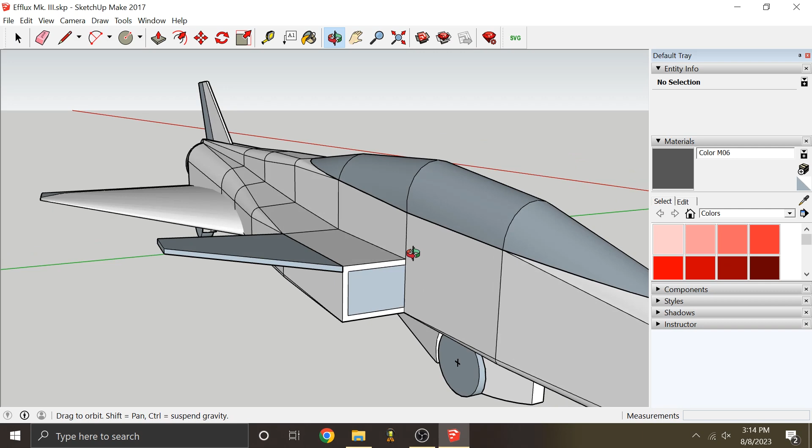I think the first place we're going to start here is getting the intake ducting sorted out, as well as the exhaust ducting, but the exhaust ducting is going to be probably a lot simpler. My main concern is we've got to make sure we leave enough space for all of the powertrain and avionics, while keeping a relatively straight shot from the intake into the fan face. We also have to add that little deployable cheater door and figure out how we're going to actuate that. I think I'll just start with the exhaust tube, because that'll probably be the simplest to do.

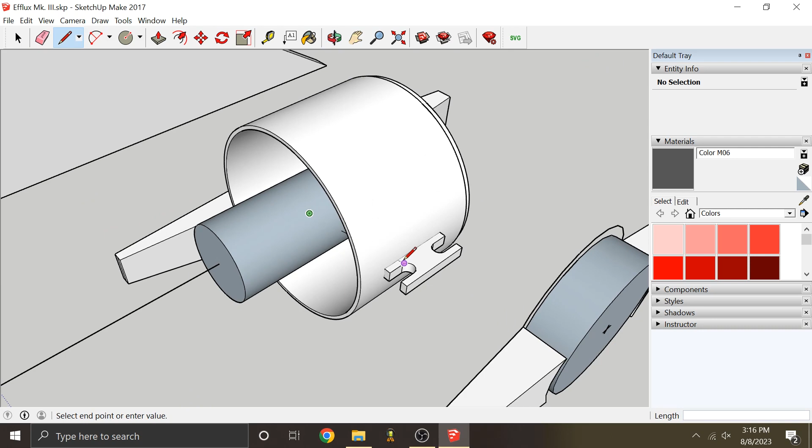So it does appear centered, so then this should be radially symmetrical. I designed this little step, a 3/16 step here, so that the foam board can slot inside the actual nozzle extension. So this will be the actual surface we're going to, and it'll go all the way to the outside diameter of the fan, and we're going to add 3/16 of foam thickness to that.

So then our thrust tube is going to look something like this, and that 3/16 will go to there. Just a simple conical tapered part. There we go. So that right there is our thrust tube.

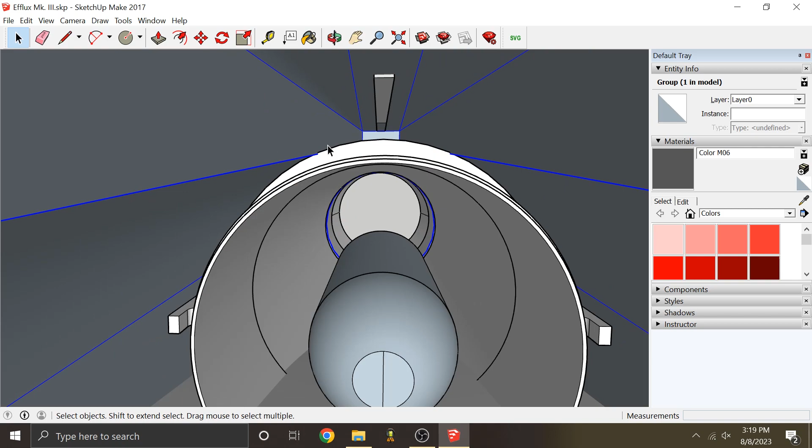And actually, if you look at that, we're going to have to do some relieving cuts here sometime. Or actually, I think what will end up happening is that this outer surface will get relief cut to clearance fit here, or something like that. We'll have a bunch of formers in here that'll go around the ducting and support it once we figure out exactly what's going on here.

Alright, so now it's time for the inlet ducting. This is going to be pretty fun to do. So the first thing I see is that this is our big battery right here, so we're going to have to stay to this side of it. So whatever that battery is doing, we're going to have to define a plane. Basically we're going to take this face straight back until the end of the battery. There we go, so there's our inlet face on one side.

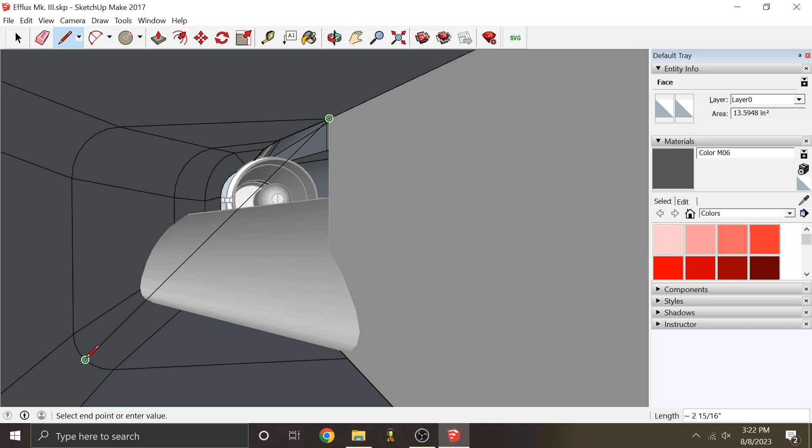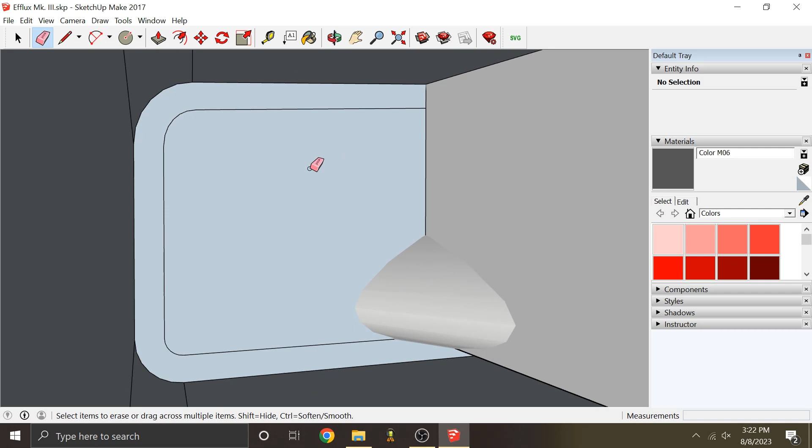The thing is, I wonder what sort of area we're dealing with here in this cross section, because if we add the thickness of the material here, I hope it's not too far below the fan swept area. Generally, when you're doing inlet ducting for ducted fans, you want to try and keep the area either expanding or constant if you can. You don't want to constrict it just to open it back up again, because if you do that, you're just making the air faster in the constricted area, which just gets you more frictional losses, more turbulence.

Oh, there's something there, but this is just that area, right? So this is 13.6 inches squared, whereas this is... oh, is that actually more? Really? That's actually more area. So that's good, it's actually expanded past what it is up front, because the inlet has gotten taller.

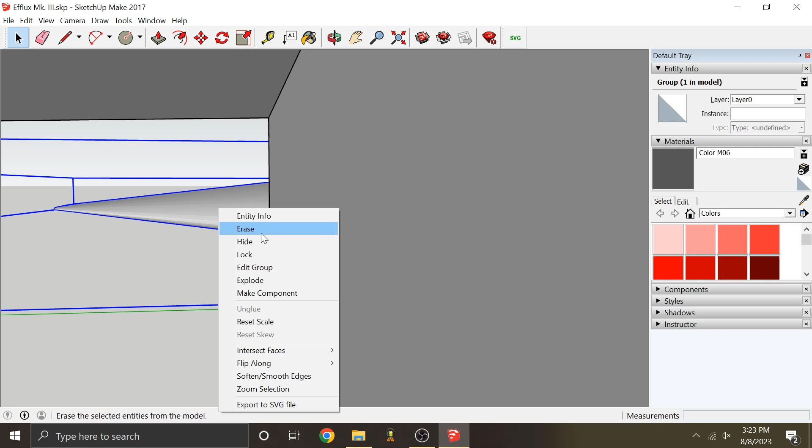So that's good. Okay, so now after this battery here, we're going to start getting into the wings here, but I'm just going to ignore the wings for now. We're going to have to sort of integrate all of this stuff together. This plane is very tightly packed, so there's going to be a lot of intersection and stuff we're going to have to deal with, and everything's going to be real close together.

So after here, well, now we have the top of the inlet surface. We could actually fill this stuff in, something like that. So we're going to have some part back here that sort of tapers inward, something like that. That'll allow the two streams to converge together. So that's our little inlet diverter thing there. So then the airflow is going to meet right here.

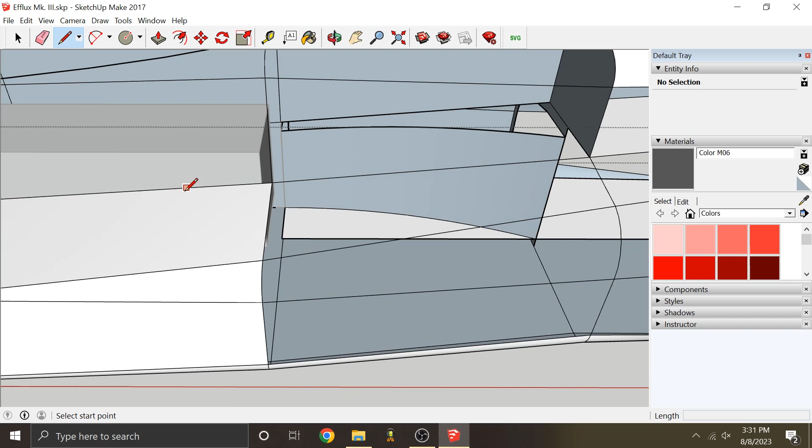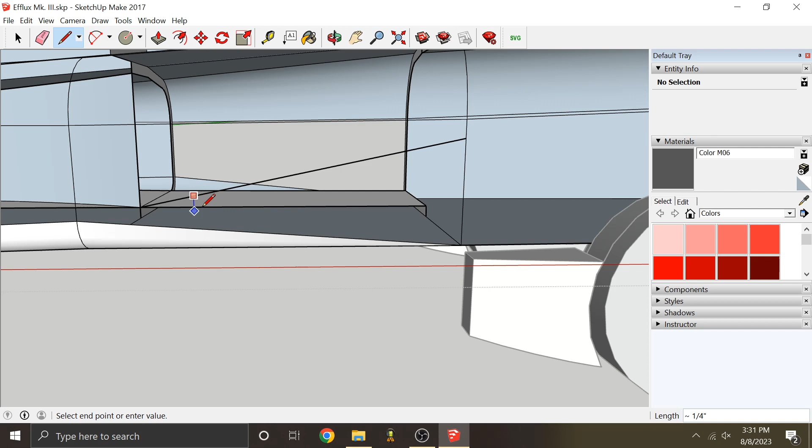So I'm thinking about how big I want this door to be. It's probably going to be fairly large, like about 6 inches long seems a good size, because what I'm concerned about is, since it's going to be hinged, we don't want the actual angle to be too big to get a lot of deflection, because that angle will induce flow separation from whatever flow is coming underneath in this direction and getting sucked up.

We don't want this angle to be too aggressive, or else it'll just separate here. From this side of the inlet, there's basically just going to be one thickness of foam. Whatever is pulling from here will probably get turbulent on the bottom anyway, but ideally it'd be a shallower angle. That also makes the surface bigger.

That makes the actuation requirements larger in terms of torque, but it also gives you a lot more airflow potential for that cheater door. So instead of going through all this inlet, you could just come in from here.

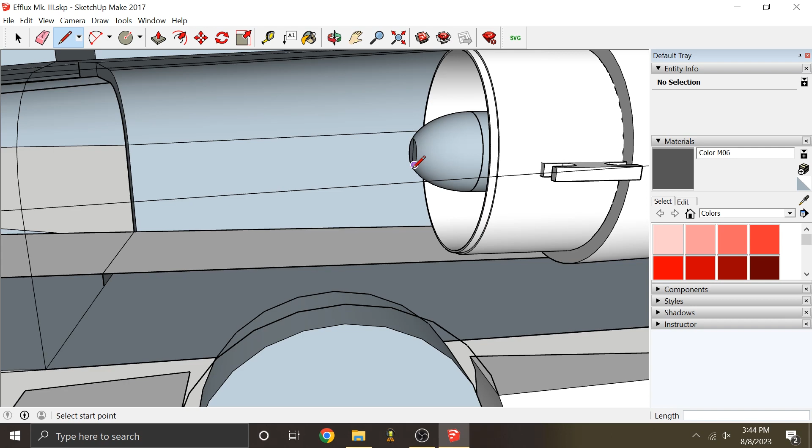Start it right about here so we get right up close to that fan face. But whatever door we have, we don't want to run into this nose cone here, so we're going to have to use that as our furthest forward point we can use.

I don't want it to get too close either, so we'll take this and punch it out of the bottom. So here is that door, and this is about what it's going to look like actuating. That's going to come up like that.

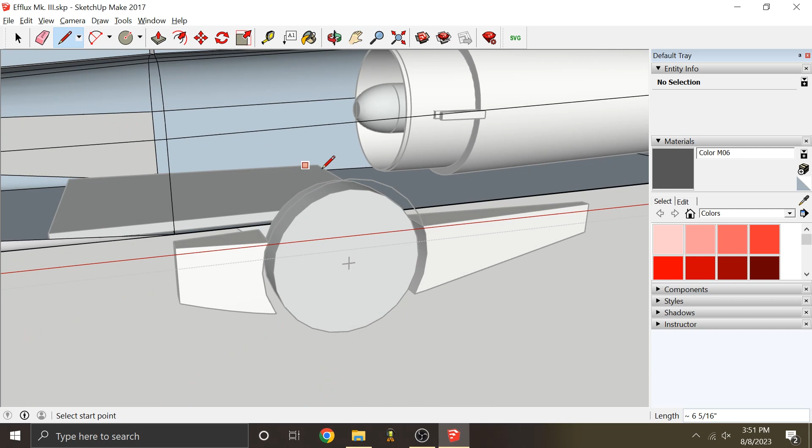This door being here means we can't have any spars or anything that would interfere with it. Let's take a look again — it'll come up into the bottom of the wing where it'll be secured, then come back, probably cross under the fan, and go back down to the other one. So it's going to be quite a complex bend there, but I think it's worth it for this door.

And we'll have a spar probably running under the fan as well, so you can get all the deflection. There's a shorter path here to get into the fan inlet. I'm liking that — that's pretty good access to the fan face there, I'd say.

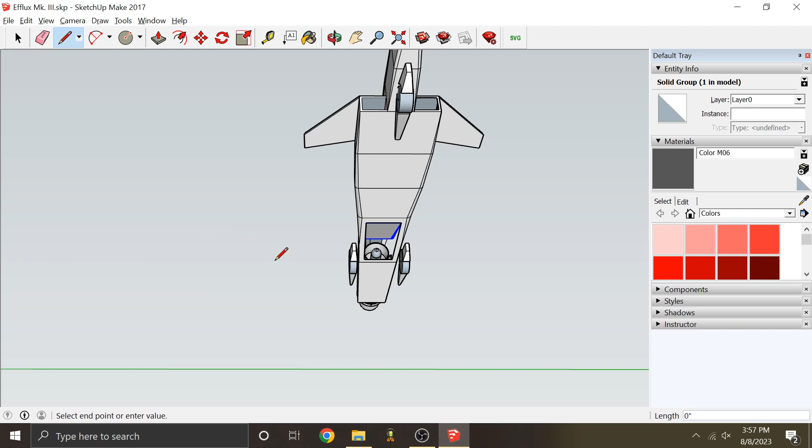So the wings here aren't going to have any of this actual wing thickness internally. They're just going to be the bottom surface of the fuselage here.

Essentially we're going to have to intersect these with the rest of the fuselage. I'm going to see if I can do that easily. That'll be all the way down to here, I think. Yep — so that's what the actual wing skin is going to end up looking like.

Now look at all that room for activities. That's a nice open duct right into the fan face there. I'm thinking of what we could do next.

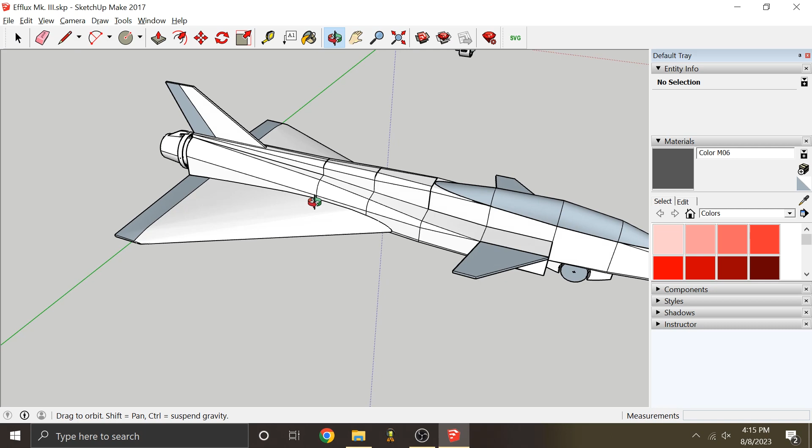I guess we could start splitting this fuselage up into the lower inlet component and this upper part of it. Then we'll have to do some work with the formers here and back behind the fan there.

So now if we take this off, we can remove that separately from everything else, except for this part, which I forgot — that should be correct. If we hide these, we can hide this and these and that.

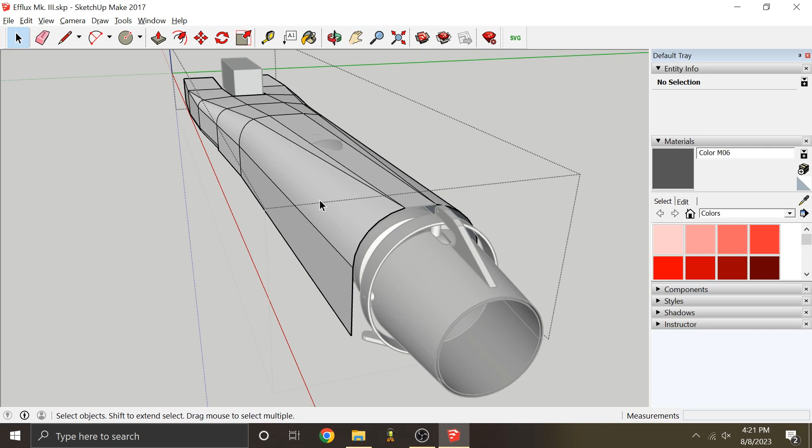So our fuselage has been separated. I think we just need to focus on this part back here. This will be fun. So maybe this is going to have to...

We're going to have to separate this a bit here, because this guy is going to be about 3/16 from there, so that's not going to be a problem, but this thrust tube will be, so we're going to have to deal with that.

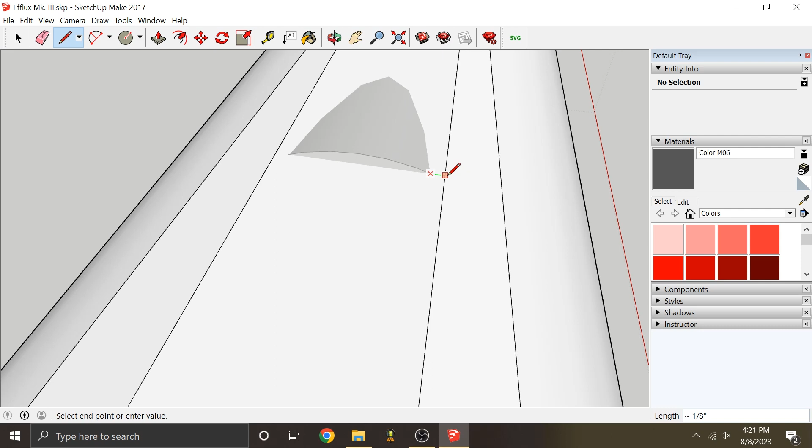I think we're just going to put one of these across here. We're just going to find where it interferes and then cut that part out of it. So take that, and then cut that part out, and that'll make clearance for this thrust tube right here.

All right, I think it's about time we put in our first former here. So we're going to hide this. Our first former is going to be on the fan.

We're going to have the former backed up to these little tabs on the fan. So the plane the former is going to be in is this plane right here. Then we're going to intersect this plane with these curves here, or these panels.

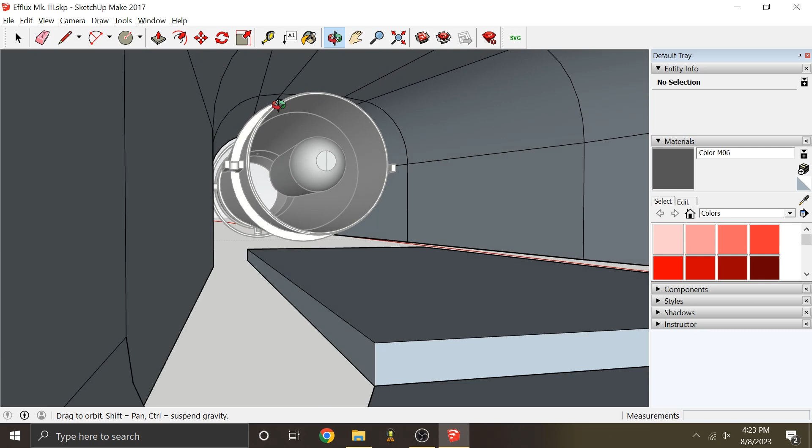There we go — that gets us these lines right here, and that subdivides this panel. Then what we can do is make this a surface, like this, or a face, and then take this and offset the edge by 3/16.

And so now that accounts for the thickness of the foam, and this right here is the former. So we'll get rid of this outer line here. Now it's worth considering that we offset it on all sides, but there's no thickness of foam on the bottom here, since this actually butts up to the bottom of the wing, so we can re-add that 3/16 we took off in the bottom.

And we can also intersect this with the fan here, and then get this out of there.

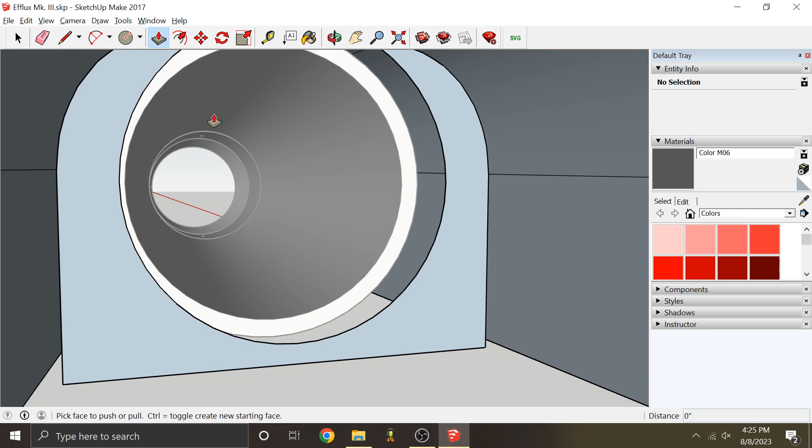And then that will be our former. I think we'll actually double stack this, so we'll go 3/16 there, another 3/16. Select all of that, make that a group.

You'll see that we have a former that will follow the contour of our fuselage with a 3/16 gap between it for foam. It meets perfectly with the bottom here, and it has the perfect contour for the fan to hold it in place.

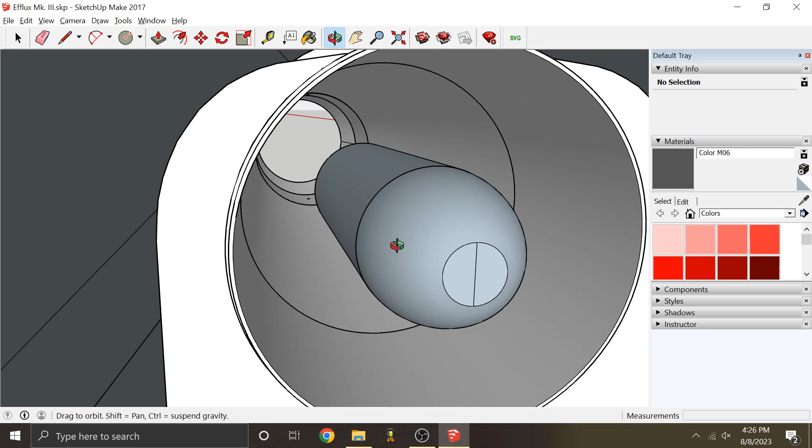So with this here, we can also add a former probably right before the end of the thrust tube. And make that a group. So that's our second former there. So we got one holding the fan, one holding the back of the fan there.

As far as the rest of this, I don't think we really have any formers to deal with because none of this can really have any formers since it's essentially just the inlet surface. So we can't add any formers in here or else we'd have to add another wall to it. So now we can move on to this one.

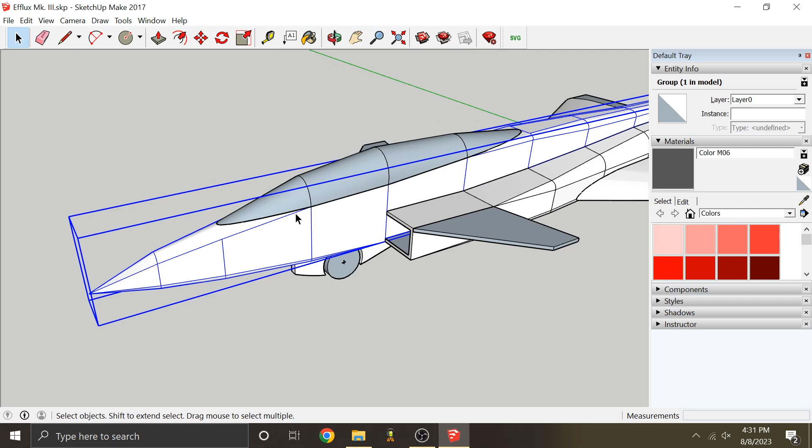There's going to be a bit more detailed former work up in the front here. Actually, let's start on this first. I think I already have formers and stuff in here, do I? Or I don't have the cross sections in. Okay, well, we'll deal with this first.

That is the former we need right there. And then we could offset this to both sides, just like we did with the other ones. With these, you could just make one and have it overlap on both sides, but that only leaves you a very small overlap. So typically I like having the double former like this so that there's more of a ledge for you to wrap your sheeting onto.

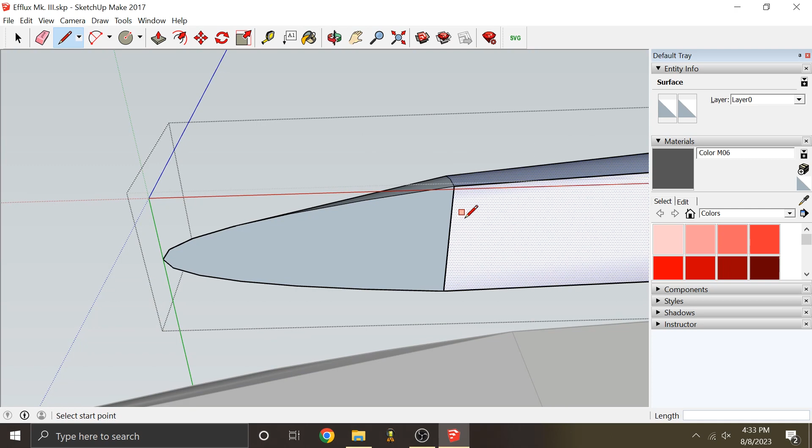Another thing with this sort of hatch design is that I'd like to have something to keep this radius and this arc here in place as well, so I'm actually going to use this as a former, and I'm going to do that on the back as well. We'll use both of these as formers.

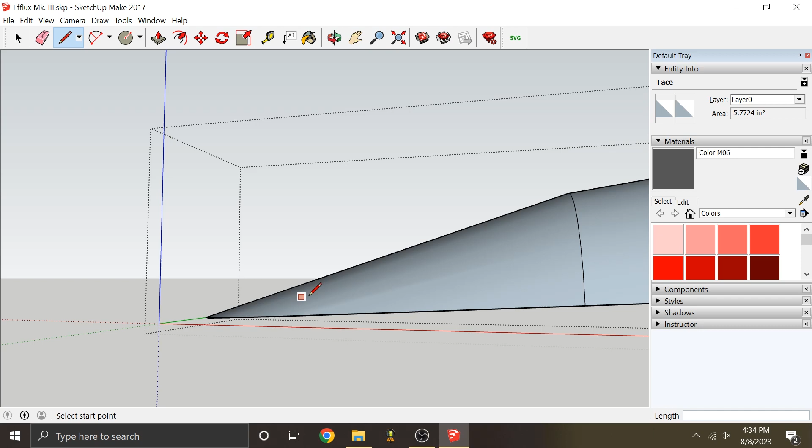And this one, since the angle here is quite severe from vertical, whereas this one isn't as severe, there's going to be a lot of trimming and beveling that has to be done on this surface down here to get it to fit up at the nose, because of that 3/16 that's going to come up like that. Basically, you're going to have to bevel that part.

And then we can actually keep these two as the same part and just fold it over when we're done. We might actually do something similar here and have sort of an insert on this piece. That would make it work, because there's not much up here, the nose wheel's behind that. So this will probably be the GPS and the pitot sensor up here.

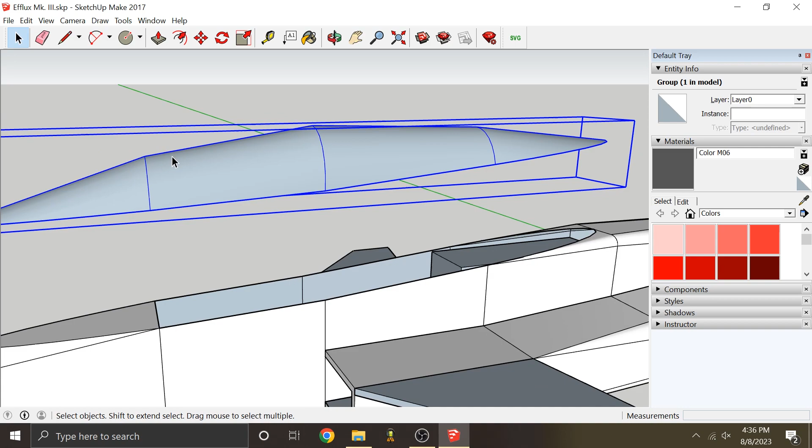So we should be able to sneak that in through the back. And then this surface and this surface will make it easy to embed magnets in here to stick the hatch on. Maybe it slots in above the battery here, some sort of slot or tab that fits under the back, and then the magnet holds it down at front. That's a potential method of hatch retention.

So again, we're just going to be making formers here. This one right here, I'm thinking we could actually combine these two into a single former, just like we did with the canopy piece up there. So that about covers it for the formers, at least in the front part here.

Now we got to start thinking about this nose wheel and how that's going to work. So I actually have the nose wheel, and I'm going to go get some dimensions off of it: 1 1/4 between the bottom of this and the top of the other one.

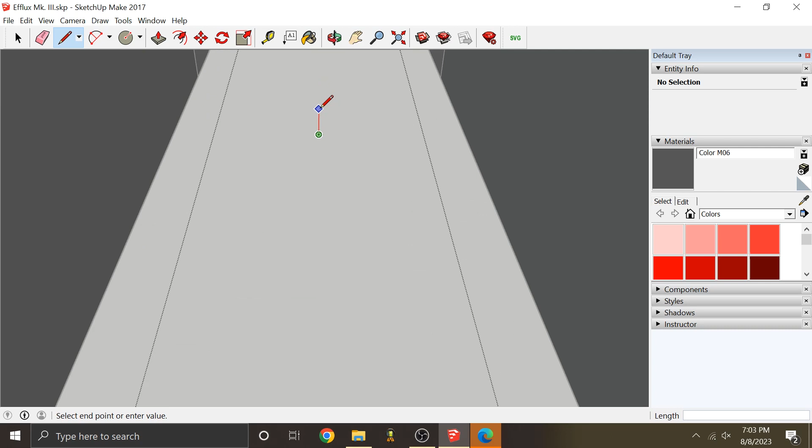And then it's going to come up just a little bit more, and then it's going to extend back, and that's going to allow the servo to do its servo thing and steer this.

It'll be a servo here with an arm that will link into this, and then the arm will keep this from moving side to side. That's basically how the nose wheel mechanism works there.

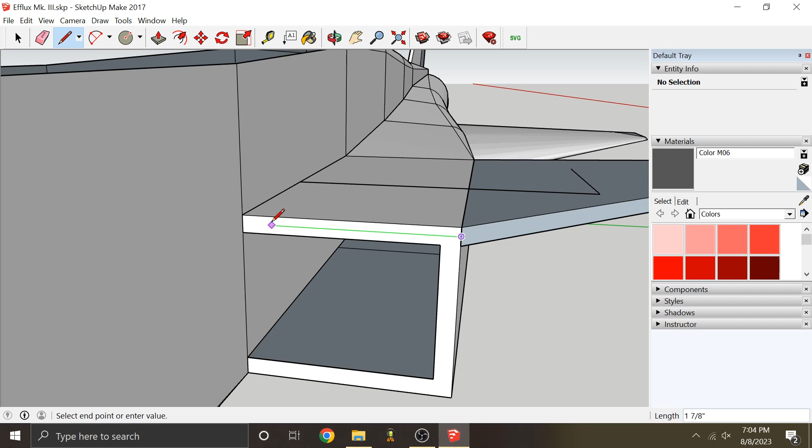Now we can also start thinking about the Canard stuff here. There's going to be supports for the Canards that go on the outside, or they're probably going to be embedded into the foam on this side piece here. It'll be a steel wire in some sort of shape like this that'll go between the two, embedded in the middle of this foam, or maybe towards the bottom of the intake, and then glued into the Canards like this on the underside.

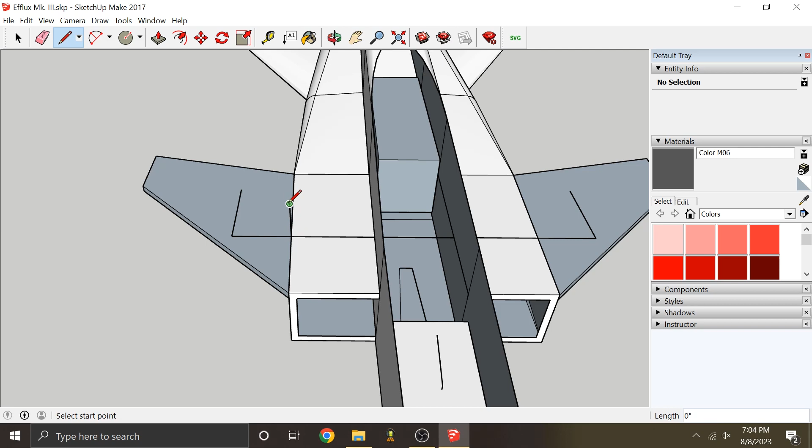And then I'm going to use servo horns, just like I'm doing with the nose gear, to attach the Canards to this, basically supporting them right at this point here. And then they're going to go across, because you'll have basically a bearing there and a bearing there, so it'll be constrained well in terms of side-to-side.

And then in the middle here, I'm going to have some sort of bend in the wire that I can get a control horn on or something, and then there's going to be a servo with a linkage set up to that. That should be able to move both canards for pitch control.

That's the idea anyway. So that servo is going to need a platform on it. The axis is probably going to be somewhere around here, so the servo mount could just be an extension of this, which would make everything simpler structurally. Probably about there looks good.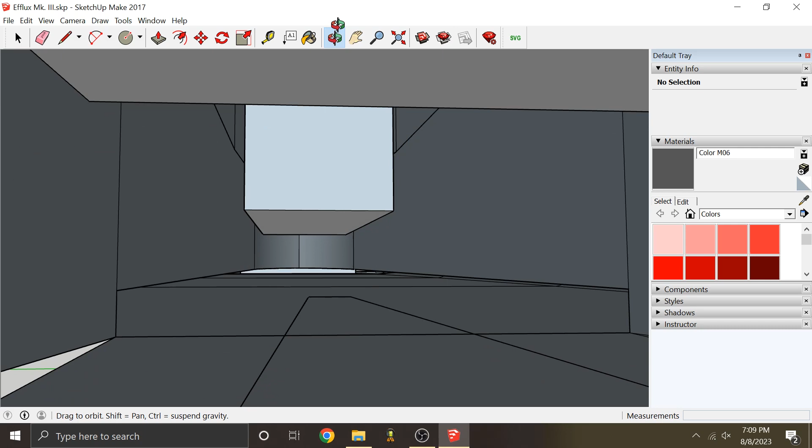Now beyond that, we have the battery tray. This is going to be interesting. I could just have it rest on the bottom of the fuselage, but I think we probably want something to hold it up off the bottom there. I think we'll probably move it here-ish. That's reasonably close to the top, but not too much where it's going to hit. We got like half an inch maybe? Yeah, half an inch. I'll move it down like an eighth.

That'll be good. Alright, so now let's pick up this bottom reference plane here, and then there's that former that automatically got generated there. Extrude that along, all the way to here. That's that — so that's what that rear former looks like. And now we can start working on the formers here.

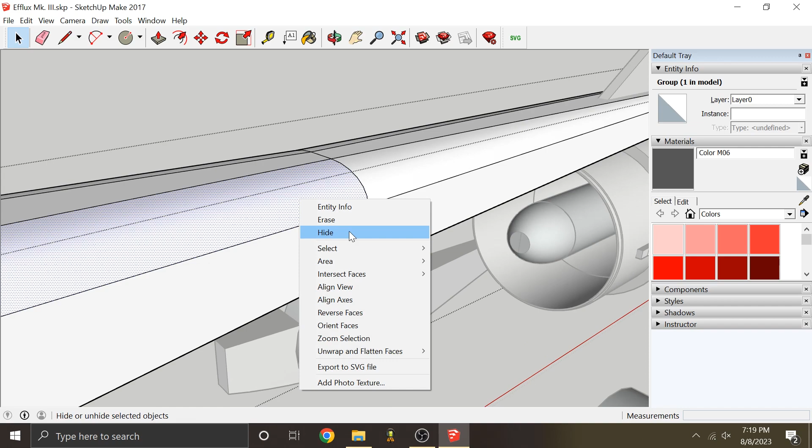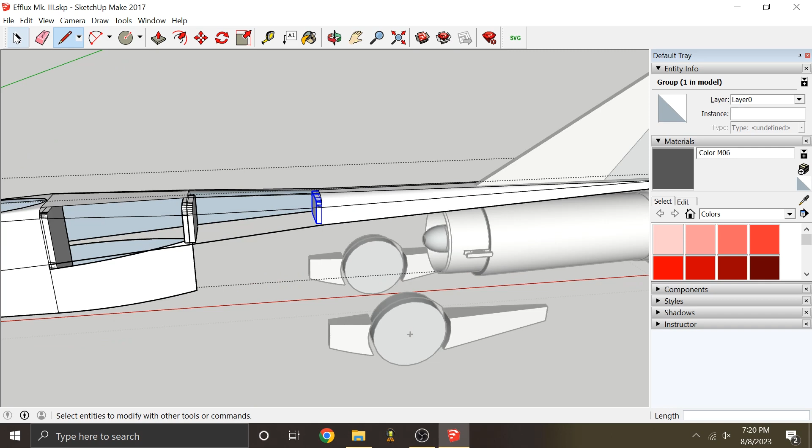Go and make components, or make group. Do that for here as well. And for this very last one, I'm not sure what we're going to have to do here, because how high is this — 5/16? This is a square section anyway, so I'm not too concerned about it. This former won't do much. In fact, I'll probably keep it open so that I can get a push rod through there for the pitch mechanism of the thrust vectoring. And I think that this part of the fuselage is done.

I guess next we'll focus on the vertical stabilizer here and integrating that into the rest of the structure. So first let's consider what's underneath this, because it's going to be doing some weird stuff here. If you can, you want to minimize the length of your load path. So for the vertical stabilizer, I'd rather go to this if I can, because this is like the main fuselage, and then it gets to the CG through this main fuselage, instead of going through the rudder and then this thing and then from this thing to the main fuselage.

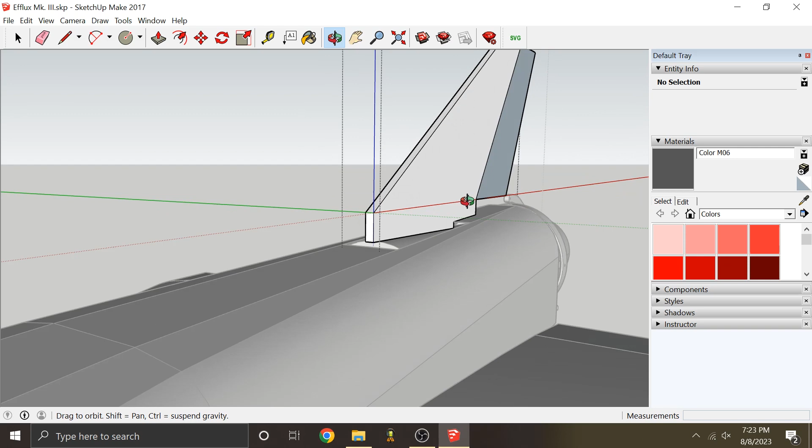So for this, we're going to want to extend this part down, offset that again, reverse faces. Alright, so that is our rudder ready to interface with the rest of the structure of the aircraft there. So now if we unhide this, we're going to cut a slot in this so that the rudder will pass through. Now you can see how this is just going to slot down just like that.

Next, we're going to look at the front of the fuselage here and how it interacts with the landing gear. I think we're going to have a cutout here for the nose wheel, just so it can do nose wheel things. So we'll erase that. And then I'm not going to model it, but I'll have some sort of small foam thing that keeps the nose wheel separate from the rest of the aircraft. I'll just do that when I'm building it.

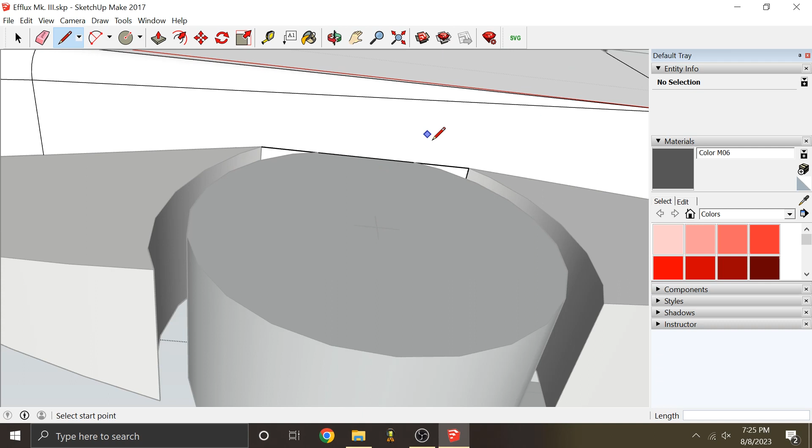I'm thinking this also needs room to pivot side to side, so I'll cut that out as well when the aircraft's fully assembled, and I can get an idea of the clearances and all the angles it needs. So that'll just stay there temporarily.

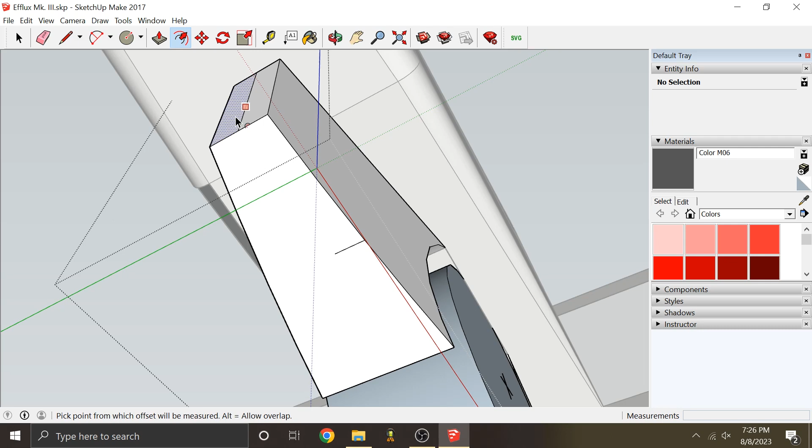I can't use the offset tool on this face because it's curved, but if I could, that's essentially what it would end up being - you'd have a perimeter around here, and there'd be a little triangle sort of wedge shape in here. We'll do that once we get to the unwrapping stage of everything.

So I think it's about time we get started on the wings, because there's not much left to do here. The one thing I see right away is that we're going to have to punch out some holes for the main landing gear here. There we go, and then we'll punch that out.

I sort of feel like making it an eighth each side, because my tolerances aren't going to be crazy good on the lateral positioning of that landing gear, so if we can get a bit of extra wiggle room it wouldn't hurt. We already got the door cut out of there, so we're definitely going to need some formers in the wing here.

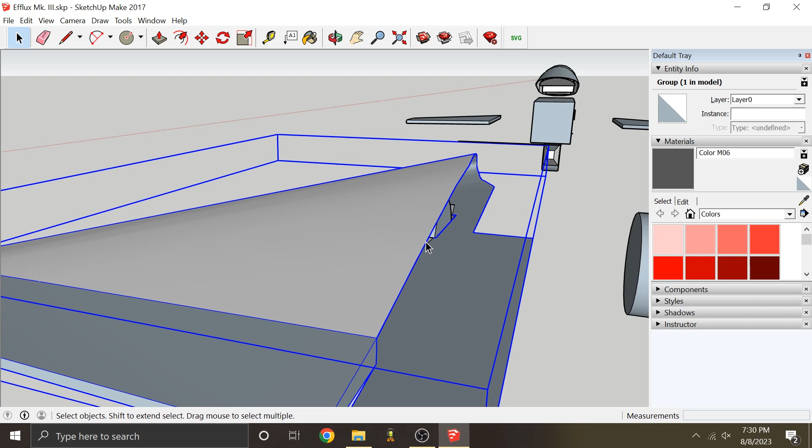I think we might be able to have this part of the wing actually slot into the side of the fuselage. That would be cool. And we'll put a bunch of slots and everything in the fuselage just to make assembly easier.

You could make a rib that would go from the back here all the way to the front and have this weird angle stuff going on, but I'd rather just have a rib that is straight relative to the rest of the aircraft, and that'll make it a good bit easier to construct.

The first thing I want to do is get a rib in there. A convenient place to do that would be just on the other side of this landing gear, right on that pocket, and that would conveniently form one side of the wheel well. So that's our wing rib.

Make that a group, and then we can extrude it this direction.

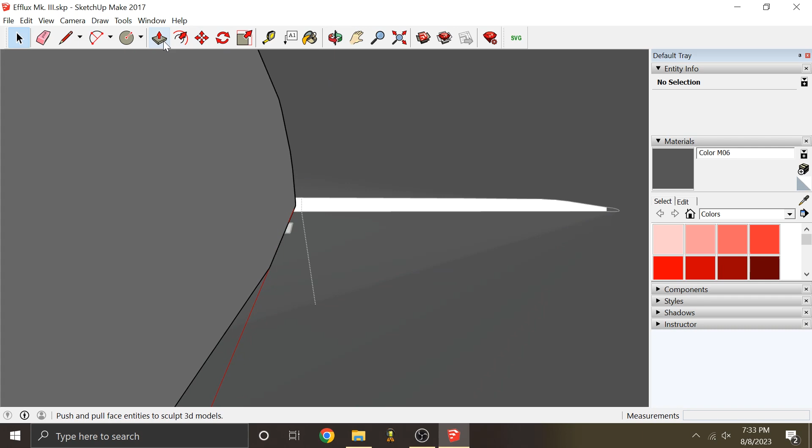Now I'm not going to try to make this control surface like the wedge that it is here. I'm just going to have the top surface of the wing, so this control surface is actually going to end up looking basically like that, without this bottom part here.

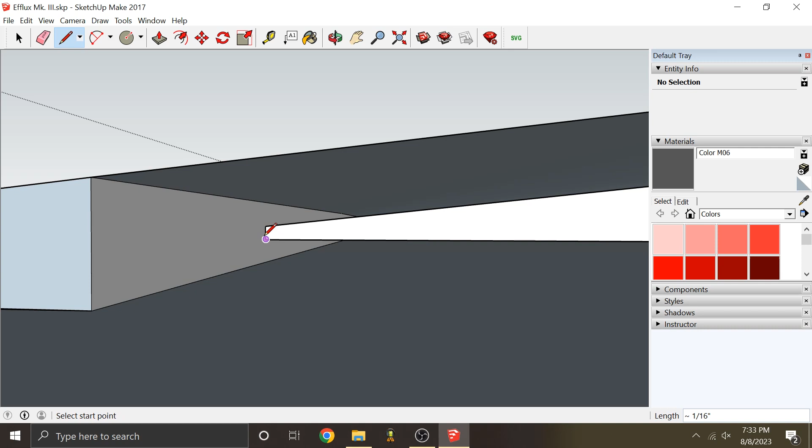So at this point where it meets here, this is 3/16 from the top, then there's this little bit here, and then there's 3/16 from the bottom. This little gap is going to get filled by basically just glue along the trailing edge. Some Flite Test models have a bigger air gap down below their elevon or aileron, but that's not the best for drag, so I try to keep this distance minimal.

So if we take the actual position that rib is at, and go to the wingtip, how far do we have? 9 5/8. So we could put a rib every 3 inches, seems all right, and we'll get like 2 more ribs in there. Actually, I think I might want to figure out where I have to start undercutting, or cutting the bottom of the wing, because once I do that, I can't put ribs in it.

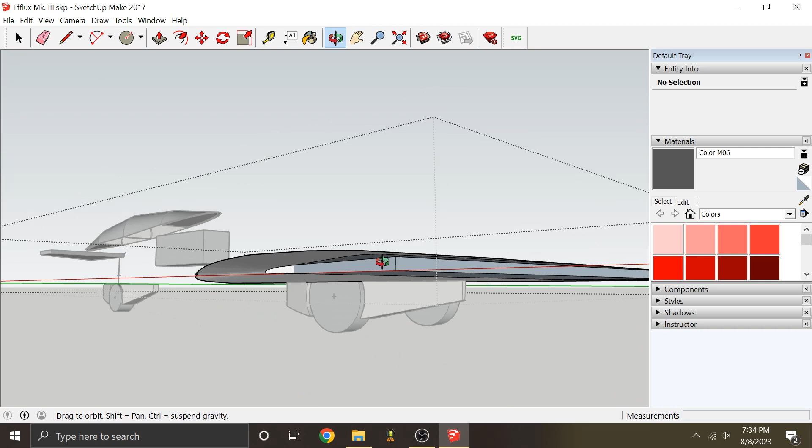So that would be 3 11/16. Cool. And you can see here on this final rib, there's pretty much 0 thickness to this actual rib, so it's just a little nub in there.

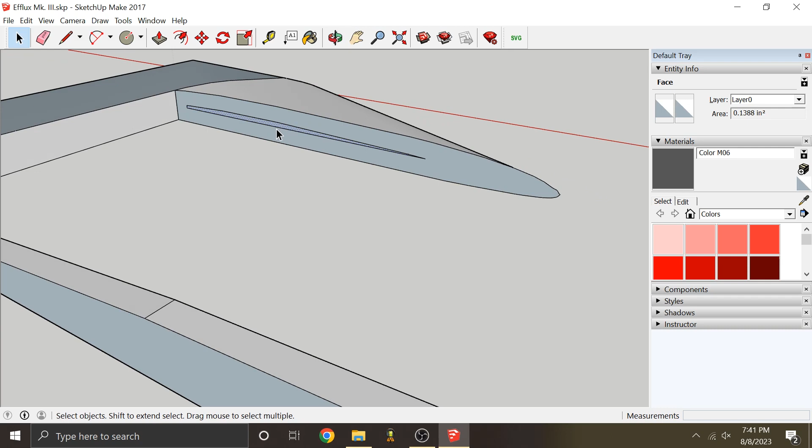Also, another thing with these is you want to extend them all the way back to the rear of the wing. And this one, you could actually almost leave completely out and it would probably be fine, but I think I'm going to leave this one out, and then this will become the cut plane for transitioning from a regular wing to an undercut wing, sort of like the Flite Test style.

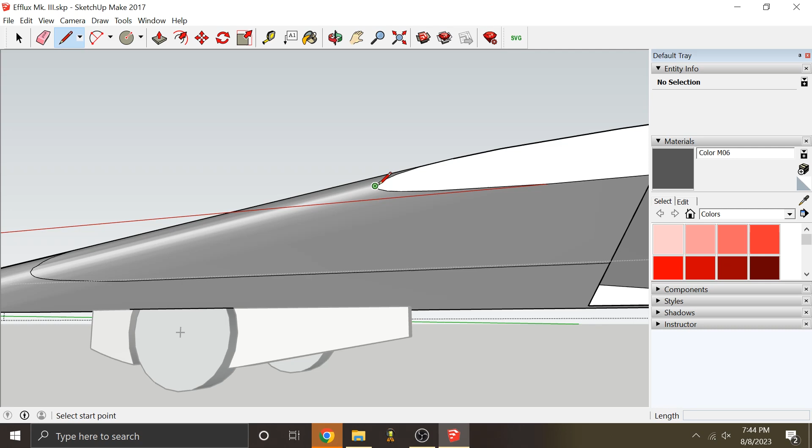And then for this part, we're going to essentially take off this part of the wing skin below the leading edge here, so we're just going to erase that.

With that done, we can start to think about the spars that are going to go in this wing. With your wings, your lift distribution is probably going to look something like this blue curve. It's going to be elliptical if your wing is designed for an elliptical lift distribution, or it'll look like something with less lift at the tips and more at the root. If your wing has any taper, and it's not negatively tapered, meaning more chord at the root than the tip, it's probably going to have a shape like this. A natural Hershey bar, rectangle-shaped wing will have a lift distribution that looks like this, because wingtip vortices actually reduce the angle of attack at the wingtips, so they generate less lift.

For the sake of structural analysis, we're going to make a simplification: we'll assume the load is distributed as shown by the red arrows instead of the blue ones. The blue is closer to the real world, and the red is our assumption. This is actually a conservative estimate, because if you summed the force under both distributions, they'd be the same, but the red force would act further out than the blue one. So you're overestimating the load you'd have to carry.

If you sum this basically constant load into a single force, it would act at half of the wing span of that particular section out from the root. Essentially, you can collapse all of this distributed force, which we're assuming is constant along the span, into a single force acting at half of the span. Then you can use that with the distance to find the moment around the center of the spar, and that moment will be the maximum bending moment the spar will experience.

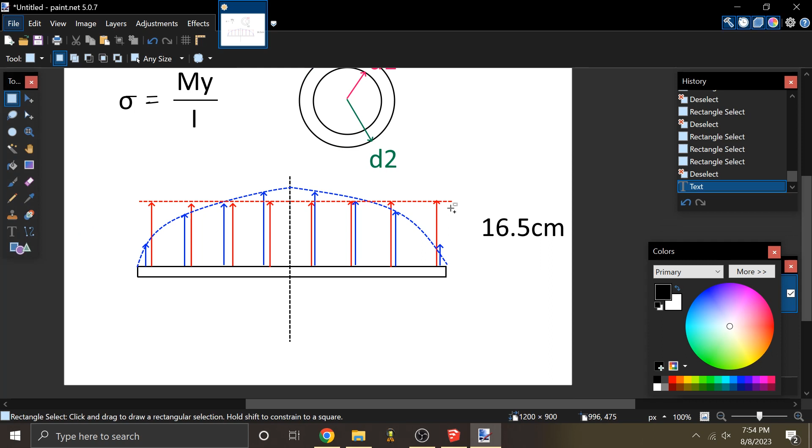And then what load are we trying to support? We know that each wing supports, in steady level flight, half of the aircraft's weight. So what's the weight of the aircraft? Current projections have mine at about 1,650 grams. So that's 1.65 kilograms, and if you multiply that by 9.81 meters per second squared, you get that the aircraft weighs about 16.2 newtons. Divide that by 2, and each wing in steady level flight would support 8.1 newtons of force.

But the aircraft doesn't spend all its time in steady level flight. For it to fly, do turns, take off and land, it has to be able to pull more than 1 G. So this weight number will actually get multiplied by the load factor of the aircraft. The load factor is basically how many G's you're pulling.

Depending on what type of aircraft you're building, you can change this so you design the spar to different design loads. For something like a big glider, a solar plane or a soaring plane, that's not doing crazy maneuvers, not dealing with huge gust loads, flying pretty slow, you can probably get away with designing for about 2.5 G. If you're a normal aircraft doing a bit of hot-dogging around the sky, some maneuvering, maybe dealing with a bit of gusting, and if you have landing gear mounted to your wings like I do, you'll want more margin since they push up on the wing structure. Funny enough, if you have engines on the wing or wingtip pods, those actually act against the lift and decrease the maximum bending load. But if you have landing gear or similar, maybe design to 5 G.

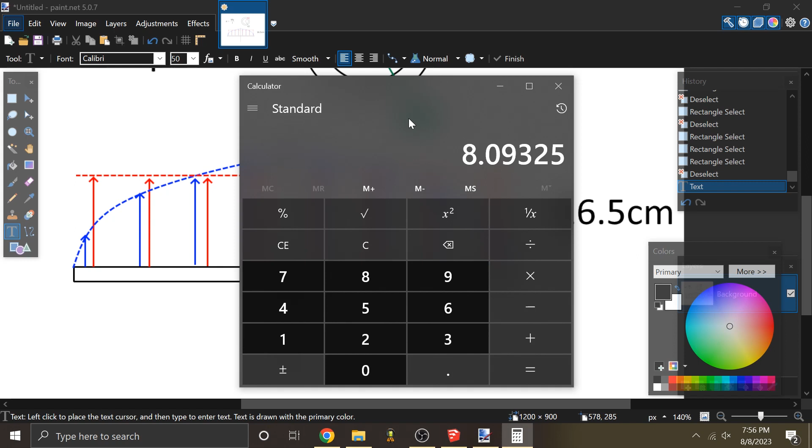So typically in aerospace, factor of safety is like 1.5, maybe 2. In spaceflight, it can be lower, like 1.25 to, I think on commercial crew missions, it's around 1.4. And basically, the lower factor of safety you can get away with, the better, because it means you're carrying less mass, but it also means less margin you have on top of your design load.

So for what I'm doing, this aircraft probably isn't going to be my fastest, but I'm expecting at least 80 miles an hour out of it, so I'm going to get a good bit of lift out of it. So I'm going to choose 10G as my ultimate target. So that's going to be 81 Newtons.

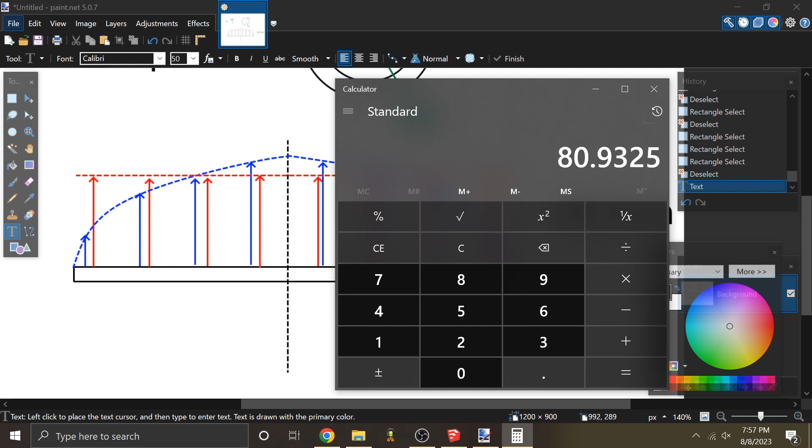Realistically, with the Efflux Mk, I think the highest I saw was around 6G. With the Mark 1, it was around 5G. So I don't think I'm going to be pulling anywhere near 10G with this, but in the event that I do, I want to make sure my spar is reasonably acceptable to handle that.

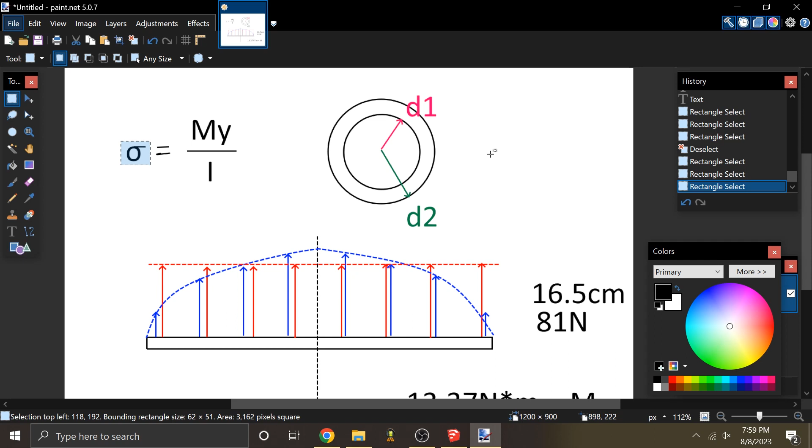I should say this analysis also assumes the failure mode of the spar will be in bending, due to axial forces within the spar. If it's something like a uniaxial carbon fiber rod, with all the fibers running in the same direction, those can fail in shear between the actual fibers. The shear forces will build up, and it'll tend to fail a good while before you actually start breaking fibers or crushing them.

So keep that in mind, especially with composites, because composites are highly non-isotropic, anisotropic. Whereas with something like metal, the tensile stress and compressive stress are going to be fairly similar. Doing this analysis with composites and expecting it to work is not a good idea generally, but we're going to do it anyways, just for sake of argument.

This analysis also assumes, by the way, that the spar is the only thing carrying the load, whereas actually the skin of the wing, in this case, will actually carry a good bit of the load.

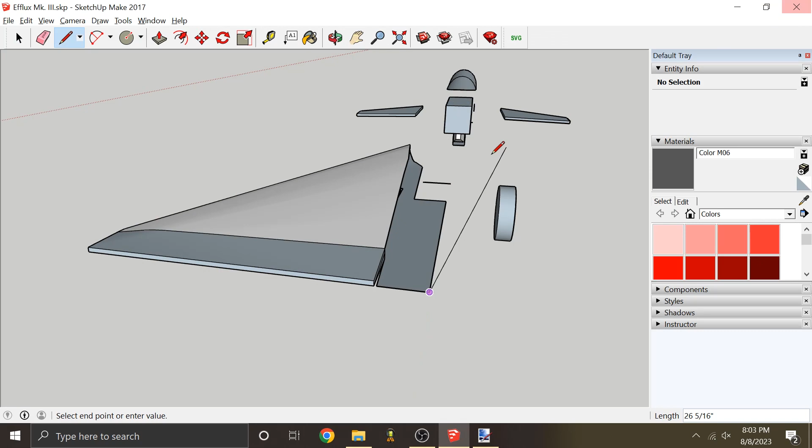So for example, if you look up the ultimate compression strength of carbon fiber, it's around 1 to 3 gigapascals, which is huge, whereas the actual epoxy that binds it together is way below that, like at least an order of magnitude. So for the purposes of this analysis, we're just going to assume compressive stress of 50 megapascals, and a pascal is 1 Newton per meter squared.

So then what's I? This is something called the cross-sectional area moment of inertia of the actual cross-section you're using. So basically it's a measure of how effective the actual cross-section is.

If you imagine we had a rectangle like this, let's change this. If we had a rectangle like this and we applied a load on it from the top, it would be a lot more resistant to bending than if we applied that same load to it like this. That's because this sort of cross-sectional shape, when loaded like this, is a lot more effective than it is like this.

And that's because there's more material farther away from what we call the neutral axis, or the line of zero compressive or tensile stress in the actual material. Because when a material is loaded in pure bending, you could imagine that if I were to have a force pushing down on this, and say the beam extends out this way, what's going to happen is this top part of the beam is going to want to stretch out, so it's going to want to go this way.

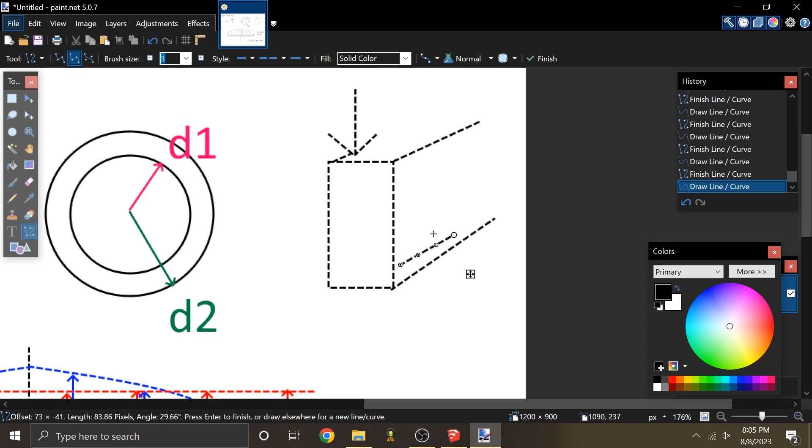The bottom part is going to want to compress, it's going to want to go this way. So inside the material, if you took a look at it, it would have compressive stress on the bottom and then tensile stress at the top.

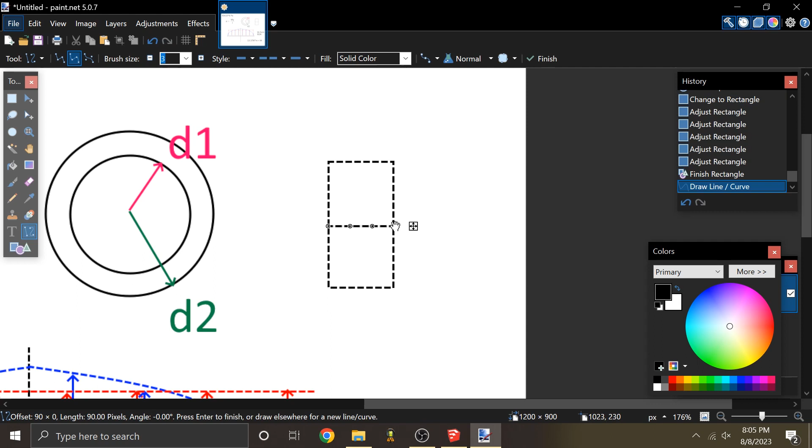The line where those two meet, where there's zero compressive or tensile stress, is called the neutral axis. For pure bending loads where there's no shear involved, that neutral axis is actually going to be in the geometric center of the cross section.

That distance from the neutral axis determines the magnitude of stress. Because the material is elastic, you could do a Hooke's law sort of analysis and say the farther you are away, per unit of angular deflection in the material, the more directly proportional that is to how much stress you have. That's the classic Hooke's law example of the material acting as a spring.

So what that means is this stress is directly proportional to y here, and this y is the distance from the neutral axis to wherever you're measuring the stress. Now we're concerned about the maximum stress, so we want to measure that distance at its maximum.

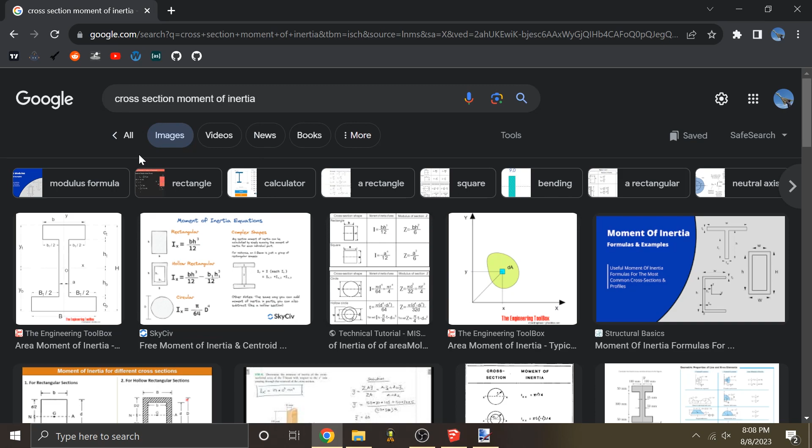There are lots of ways online to figure out the cross-section moment of inertia of whatever particular shape you have. There are calculators for non-standard shapes, and there are ways you can add and subtract shapes. It all comes down to a bunch of integrals and calculus, but it's not too hard once you get the hang of it.

The moment of inertia is pi times the radius to the 4th power divided by 4 for a circle, and for a hollow circle you just subtract the difference between the radii. You can see it's also pi times diameter to the 4th over 64, which is the same as radius to the 4th over 4.

So the carbon fiber spars I have are 7.5 millimeters in diameter, and they have a 0.5 millimeter wall thickness. Multiply that by pi, then divide by 4. So actually it's 0.675 — we call that 6.75 times 10 to the minus 11 meters to the 4th.

All right, so now that we know these values, we can go ahead and calculate the stress for this given bending load and the length there.

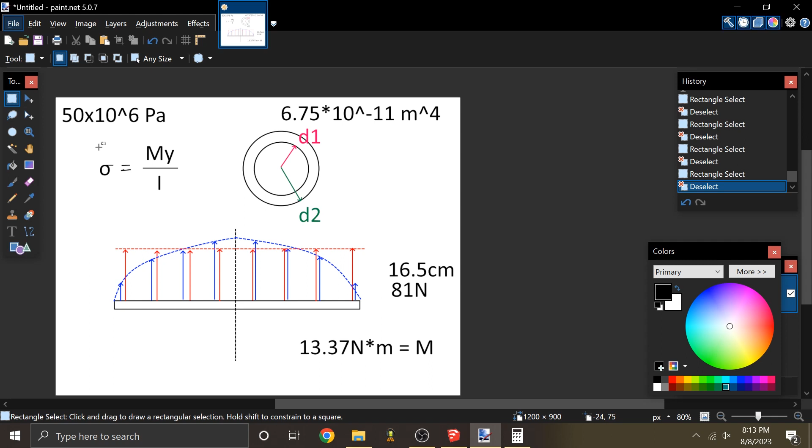Onto that carbon fiber rod, the epoxy would probably just break out of it, and then it would fail somehow. But I can tell you I have these rods in hand, and I can feel that they're plenty stiff for what they need to do. They're not super stiff, but we have multiple of them, and it's sort of a touchy-feely thing. If you can get this to work out good, then whatever you do here will definitely work out good. If it looks good and the math says it'll work and it feels good, it'll probably work.

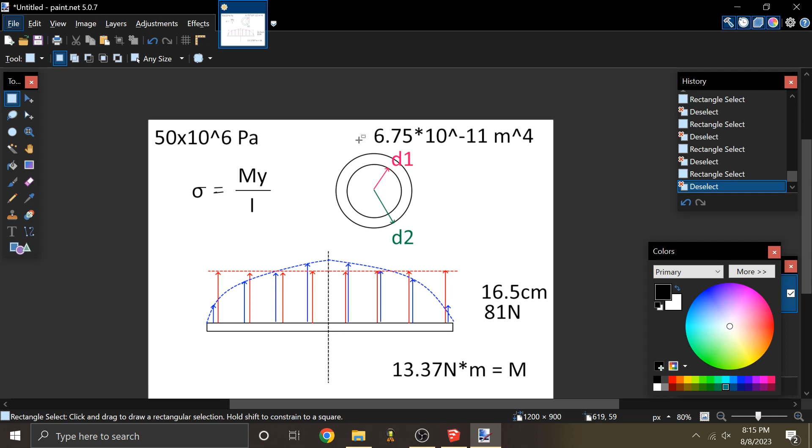This isn't the most accurate analysis because the skin of the aircraft does a lot more, especially on these foam board builds, than you'd actually expect. That's how Flite Test is able to get away with making spars out of foam — just by getting enough separation, like we were saying, distance from the neutral axis, so it can handle those high bending loads.

So now we have the task of putting the spars in this thing. First, let's find where that fan is, because that's going to be in our way.

Something about wings is that they generate most of their lift towards the front of the wing. So if you had a rectangular wing and the airflow was coming at it from this direction, the center of lift of the wing would actually be around a quarter of the way back from the front of the wing.

So the lift, if you consider it as a force, and the wing had an airfoil shape going up like this, if you integrate all of the lift over the entire wing, it would act at this quarter chord line. That's pretty true for most wings.

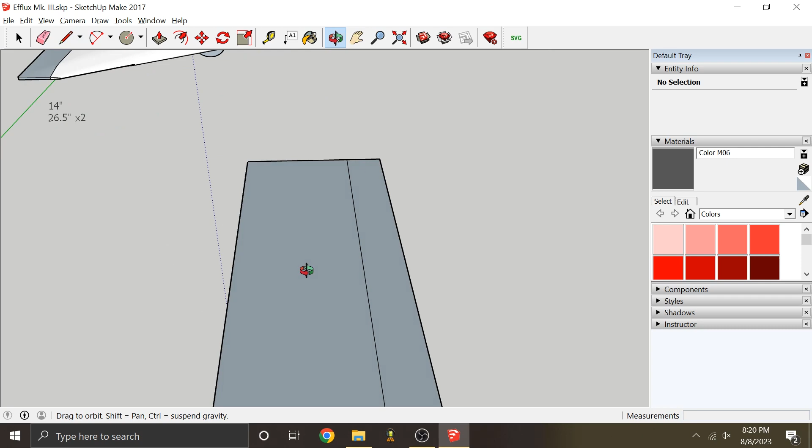If you're thinking about the load on this wing and where to put the spar so it's on that quarter chord for structural efficiency, it gets a bit hard with delta wings, but if you do it so that approximately a quarter of the area is in front and approximately three-quarters is in the rear, you'll be pretty close.

Looking at this, it would be nice if we could put our spar right here, but the landing gear's in the way, and we can't put it in front because we have the door. So the only places we could really put it is up here where there's no wing, so there's not really a good point to putting it there, or we could put it right under the fan. I think that's probably going to be where we end up putting it.

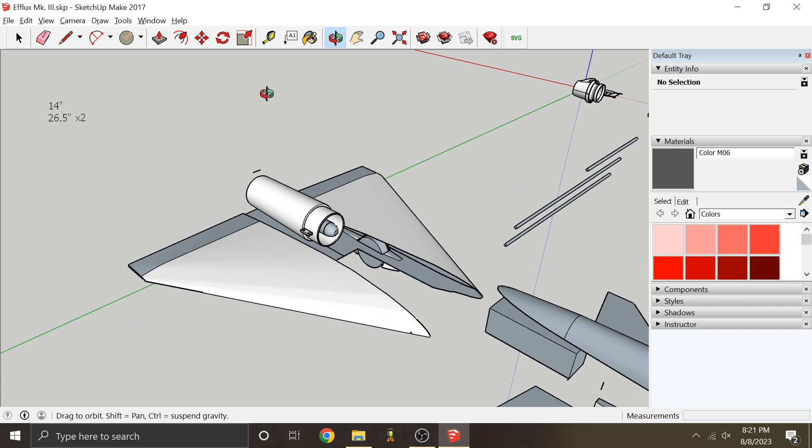We have a bunch of spars, so maybe we could put one here, then we could put one across here too. We don't have to keep them all in one space, but just considering the actual lift force that's acting, it would make sense to put most of them here if we could, but we can't, so we put most of them here.

So it's pretty much 5/16. Anything that's 5/16 or greater, this thing will fit in. So what's the thickness here? About 7/16. Okay, so it'll still fit in at least to the second rib here.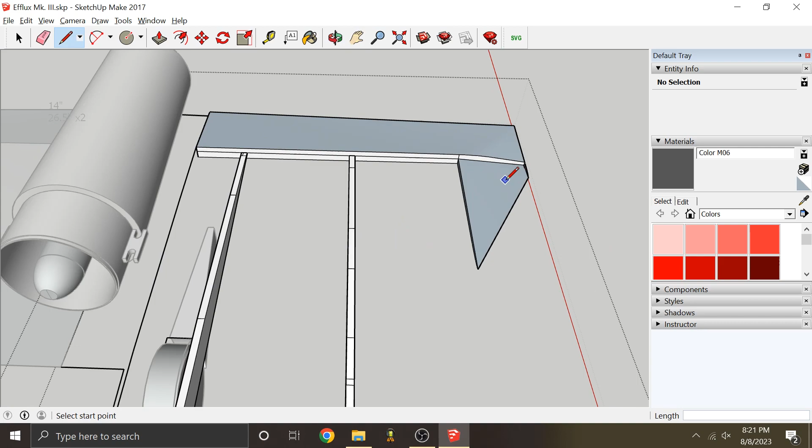Beyond that, I think the foam board, based on my intuition, should do a pretty good job of keeping the wing from bending. So if we can poke it out just a little bit beyond the second rib, I think we'll be good. I think we'll put 2 main spars under the fan, and then- oh, that's another thing. Are we going to have space under the fan?

Let's see, because we only have 3/16 there, right? Yeah, we only have 3/16, not 7/16. This is what happens when everything gets packed so tight, is that it's just hard to fit stuff. Because we can't move this thing up anymore, because then it would hit the top of everything, and this would start coming out of the top of the aircraft.

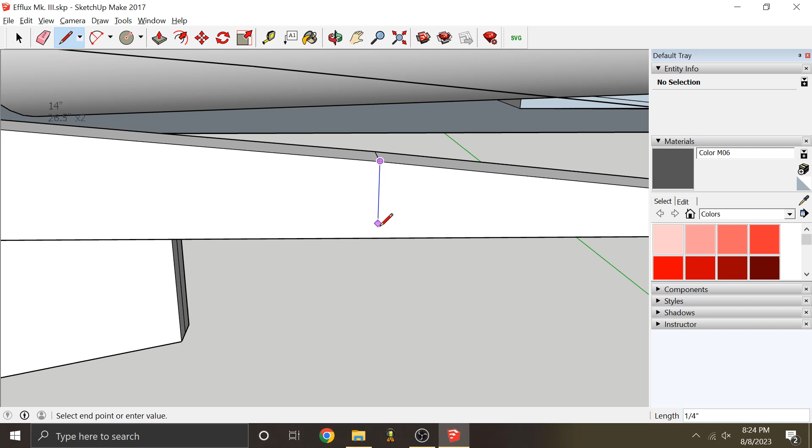What's the furthest back we could put one of these, really? Is this 5/16? That's about 5/16, right there actually. So this is probably the perfect place to put that other spar, and then as the wing decreases in thickness as it comes out and tapers to the back here, we could have an auxiliary spar in the back, or maybe we run these at angles, actually.

Something like that. And then we have some sort of spar that goes behind it that'll triangulate the load- or not triangulate, but because there's no join between the spars, a spar this way that'll take the load within the wing, and then one to take it across the 2 wings, or maybe multiple behind here.

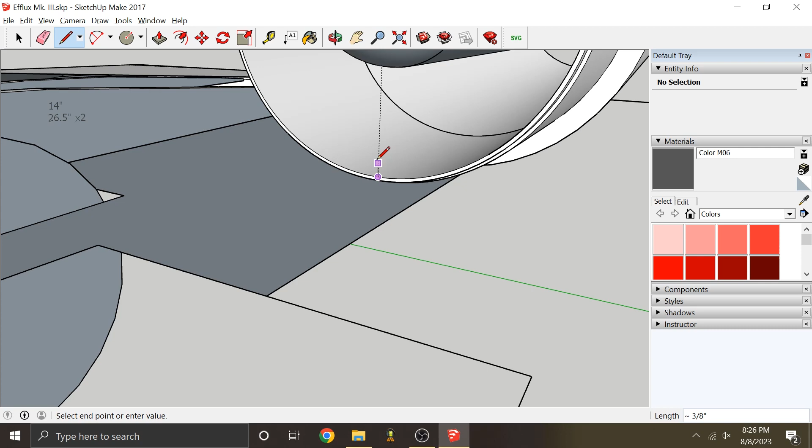I don't quite like the idea of putting something in the airflow here, but I think if it's necessary, like having a little 1/8 inch lip or something in front of the fan is not really going to matter, especially if we have the bell mouth on. And if anything, we might be able to feather that into this ledge here and get a bit more of a radius going into the intake, so that might help when the doors open.

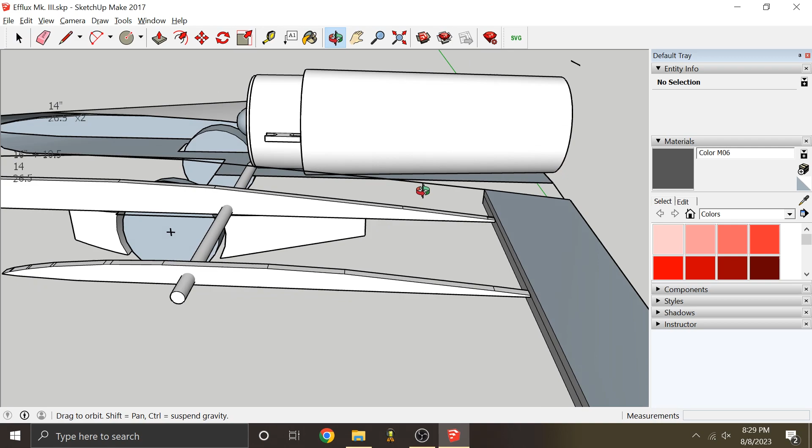We'll take it 8 inches out each side, call it good. I think we said we wanted one behind the fan too, so I'm going to try and find a good spot for that. Put that around here-ish would be good. Offset this out, and that's going to come to around the same distance, I think.

And then we'll go all the way back to center line. It'll poke into the thrust tube a little bit, but that's fine by me. We'll just have to clearance the thrust tube a little bit. So I'm wondering if we could get some sort of sideways bit in here. And I think right about there, just call it good. So that's going to be the main structure inside our wing there.

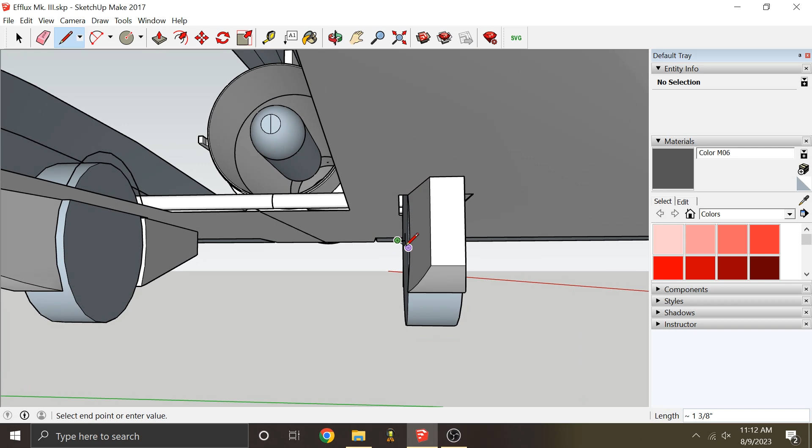One of the last things we have to do here is just to figure out where the main landing gear wire is going to go. So it's probably going to come out of here. And the wire I'm going to be using is 1/8 inch thick, so we'll just add an 1/8 inch there, and that'll add some spacing for the wheels, side to side.

It's going to come up into here, probably like that, and then it's going to go maybe an eighth of an inch up into the foam, back up to the spar. There's probably going to be some sort of sheet that'll go on top of this and cover it, and then blend that into the spar just to get a nice inlet lip here. So that'll be the main landing gear we have to bend up, and I'll just copy that to the other side.

So now, as far as I know, I think that's it for structural design. I think everything is there that we need. All the widths of the foam and stuff is accounted for, and all of the skins and formers work out.

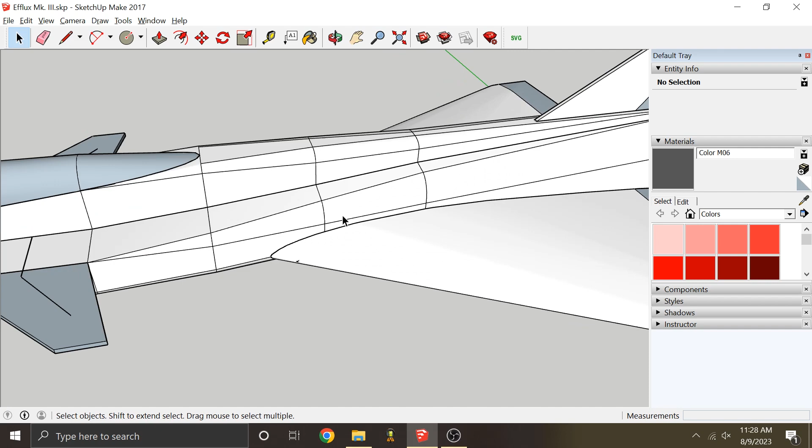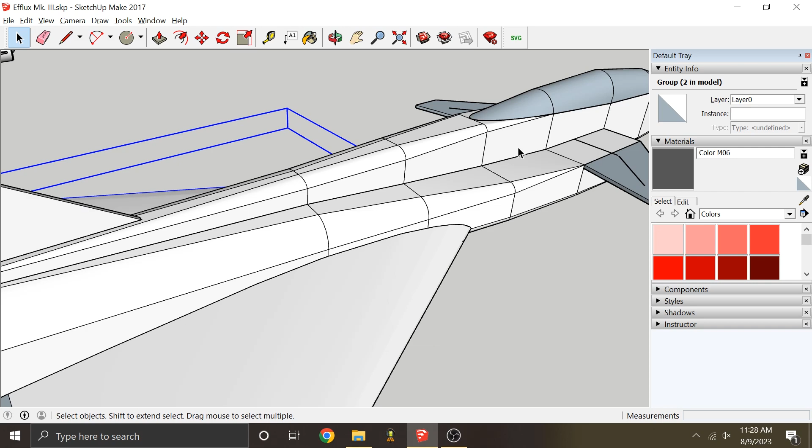So to make this go together easier, and for some of the structural or shape holding of the wing around the wing root, we're going to use some tabs here to make everything go together easily. You could align all of this by hand and get it exactly perfect, but if you have registering tabs that keep the parts oriented with respect to other parts properly, that can make it a lot easier to assemble everything because it'll just slot together like Lego.

Now you could put some of those on the landing gear fairing bits here, but I don't think those will be necessary since I can position these pretty much by eye after the landing gear and stuff is installed. They're not super critical to anything, so I'm not going to bother with tabs on those. But where I am going to use them is some of the fuselage stuff here.

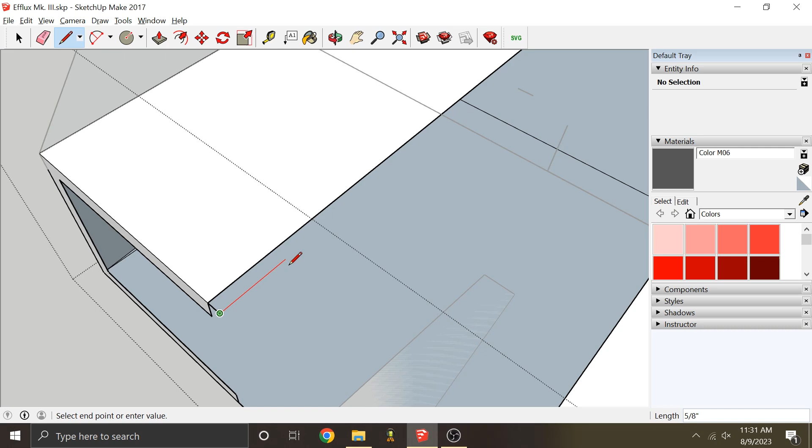For tabs, you could go full depth of the foam, 3/16, but I think we're going to keep it to an eighth of an inch. A sixteenth is probably too small, but you don't want so much that it's going to poke out and be visible on the other side. I want everything to look relatively clean, because with this technique you risk disturbing the other side of the foam when you gouge out that little slot. So I think we'll do half inch by eighth inch slots here.

We can go back into our fuselage here, and then we could actually pick up the location of those tabs right here, and right here, and right here, and then right here. We can just bring those down the width of the foam, which is 3/16. And of course we can copy this to the other side.

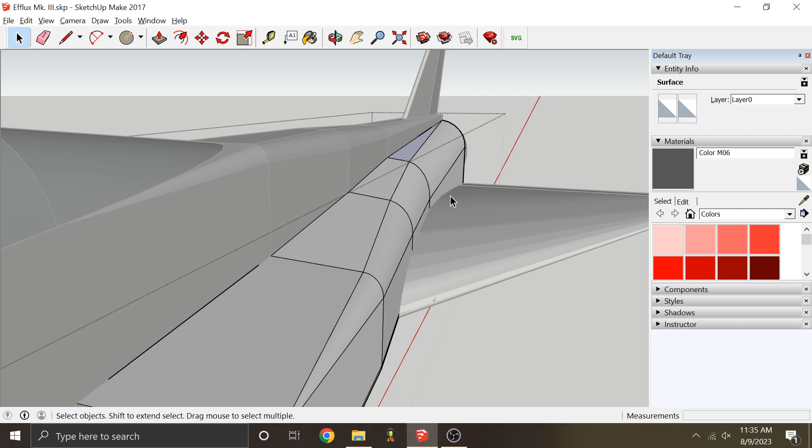So after these two pieces, these fuselage pieces are going to continue under this ridge back here, so we don't need to worry about slots in these pieces, but we do need to worry about slots in these pieces. This top part is actually going to slot down into this bottom part. Copy those to the other side, and we can add these onto the formers as well. So then we can transfer these into these pieces.

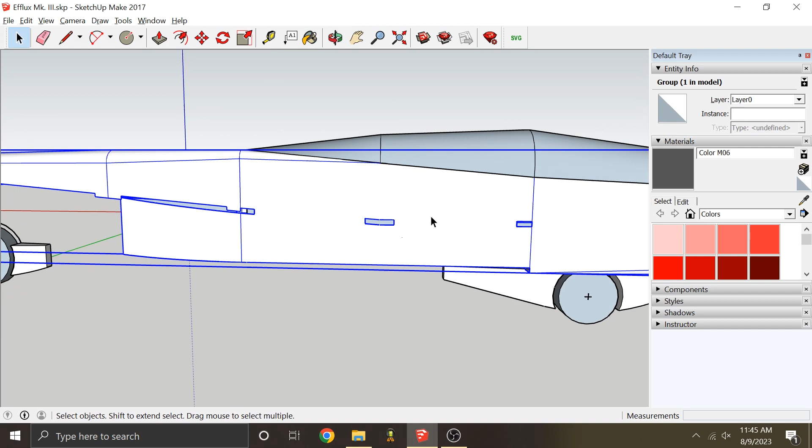Next we can work on these pieces into the bottom plate, and of course this former here. So now we can focus on this guy into the bottom of the wings here, and we'll copy that to the other side. Since those tabs are only an eighth of an inch, when we go to transfer these to the wings, you'll see they actually come short of where we need them to be.

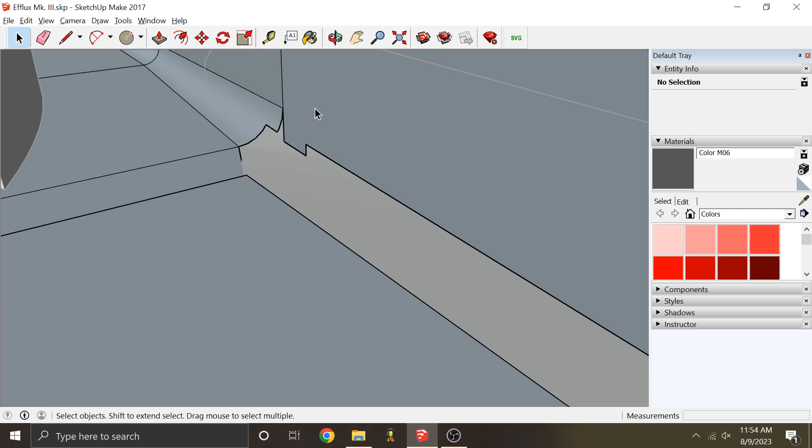Actually, thinking about it here, I don't think we need a tab here really, because this is going to be visible on this portion of it. I'd rather have some sort of overlap going on there than this. So this part right here is going to be folded like this. Then the rest of these on the inside, we've just got to project those down to the surface of the wing. So that's the bottom of the wing done.

Now the final tabbed interface we have is going to be between the wings and the actual fuselage itself. With this we're going to need a bit more tabs than usual, just because we're trying to hold the shape of the wing here, so I'll try and get them on a reasonably close to regular spacing.

Alright, so now we'll transfer those over to the fuselage here. I'll count six. 2, 3, 4, 5, 6. Perfect, and there we go. So now we'll just copy that to the other side, and we'll copy the wing to the other side. And that's it — the structural design for this aircraft is done.